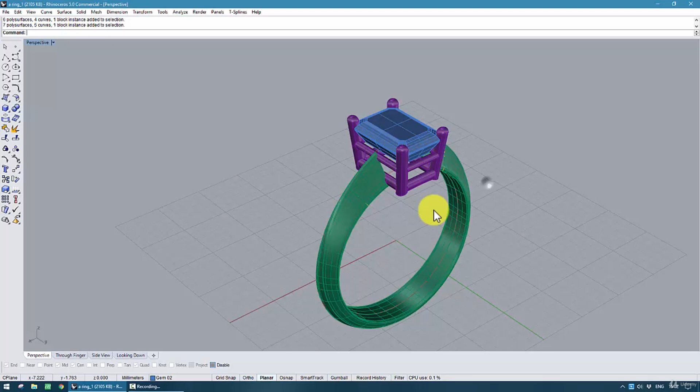Hello guys, today I would like to make a video quite different than the other videos from my courses and everything. Today it's not really a CAD tutorial. Today I want to show you something. I found this CAD file on a website. You know, there are websites where you can download files. Someone was selling this.

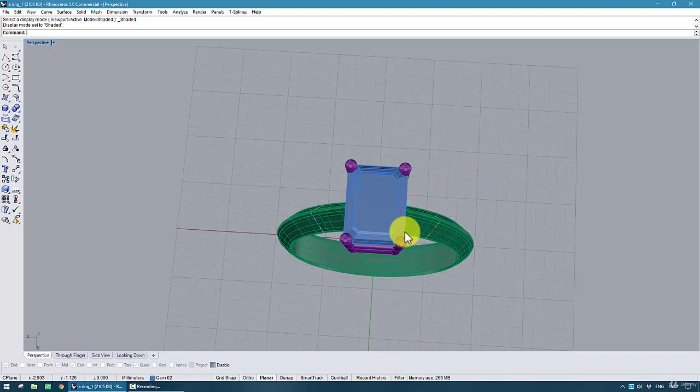As I said, this is not a CAD tutorial. I'm just using this file. I actually bought this file because I want to show you what a bad ring looks like. This is not about I like it, I don't like it. The video I'm gonna make today is from a technical point of view, why this ring, in my personal opinion, is wrong.

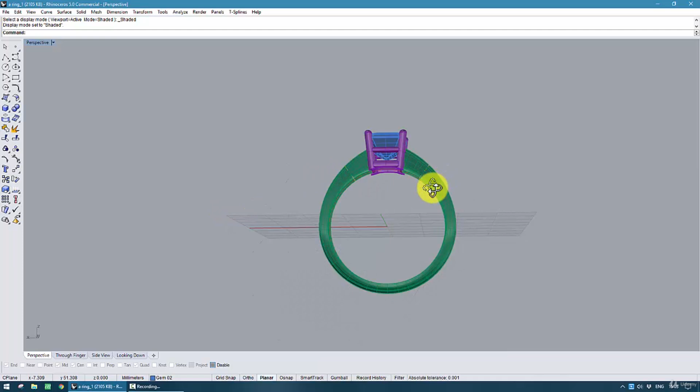I'm not criticizing anyone's work. I'm not gonna say who did it. I'm not gonna write down any names. I don't know who did it actually, so it doesn't matter. Why do I think, and again this is my personal opinion, that this ring is wrong? Several things. First of all, if you look at the shank, it's not the first thing that is wrong, but you can see that it's very thin.

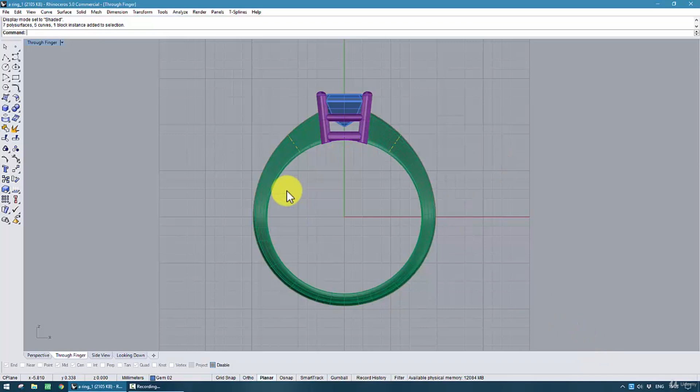This file I assume has been done in Matrix because of the gems layout. It doesn't really matter. As I said, this is not a CAD tutorial. I'm just using Rhino because I got this file in Rhino format, so I could use it as a whiteboard to show you. Why do I think it's wrong? First of all, as I said, the thickness of the shank. Let's measure this. Linear dimension.

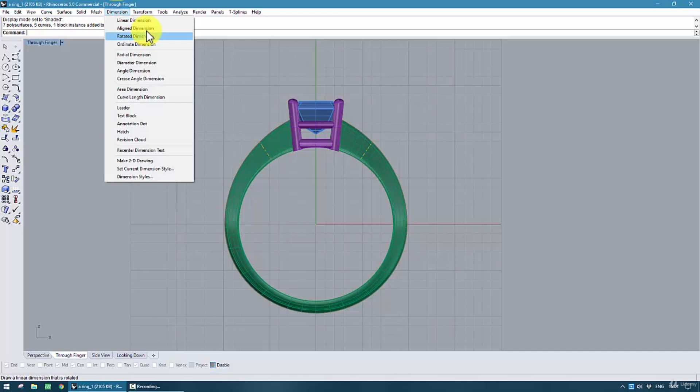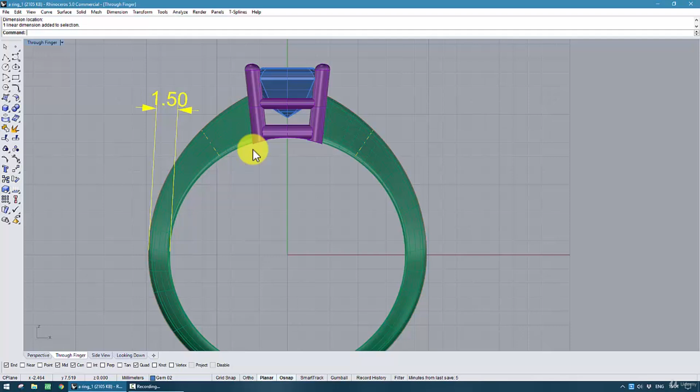Let's see, this is 1.3. 1.3 on the CAD is gonna be 1.1 once it's cleaned up and polished. So in my opinion, it's too thin. If you check the sides, 1.5. Again, 1.5 is going to end up being 1.3. I usually would not make it less than 1.5 on the final. So when I make the CAD file, I tend to use 1.8. 1.6 I would consider thin already. It's not super bad, but it's too thin anyway.

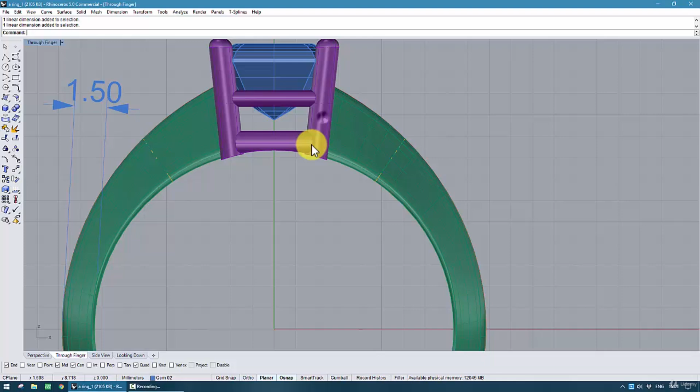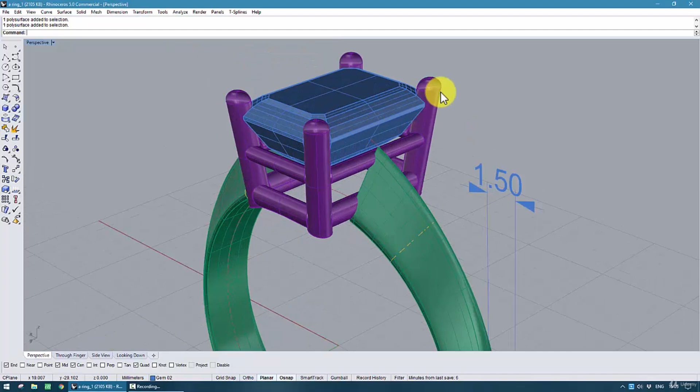What else is wrong here? You can see the way this joins to this. It's just too thin. Overall the whole model is flimsy, so this setting is just too thin everywhere, so the stone is not really secure. It's quite likely that the setter might not even be able to set it properly. If you see the claw, it's too far inside the stone. It doesn't need to be like that.

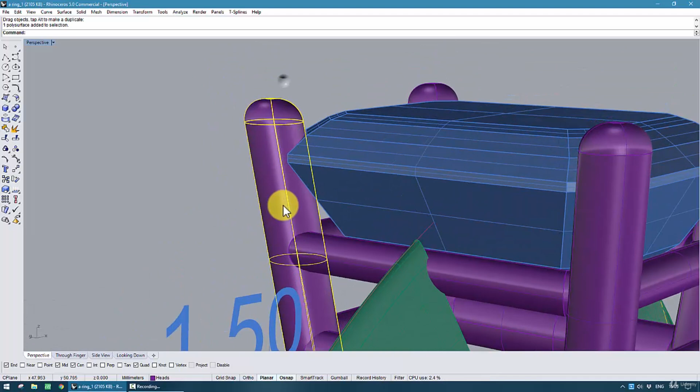It should be fine. You have to bear in mind that the metal contracts. The metal always shrinks a little bit. So this is usually how I would do it. That is way too much. The problem you could find is that once the setter is setting it, the setter needs to remove a lot of metal. So once the setter is setting the claw, you would end up with a little bump here. That's just not nice. It shouldn't be like that.

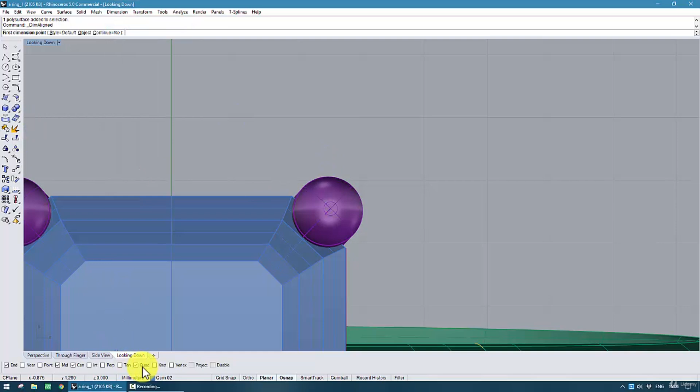The thickness is alright. I think that's gonna be like 0.8 or something like that. Dimensions, aligned dimensions. 1.1. So it's alright. In terms of thickness, it's alright.

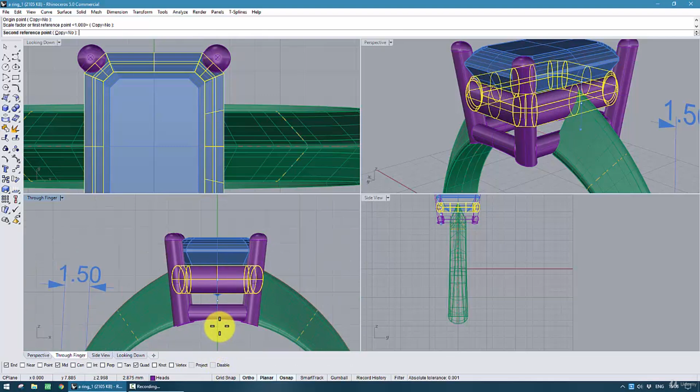What else? This. We talked about the thickness when I was in perspective; this way it should be a bit thicker, it should always be thicker this way. I'm not editing the file properly now, I just want to show you what I would change. This should be thicker. I tend to make it quite thick and I tend to make it straight. You could also make it round, it's possible, but it should be thicker.

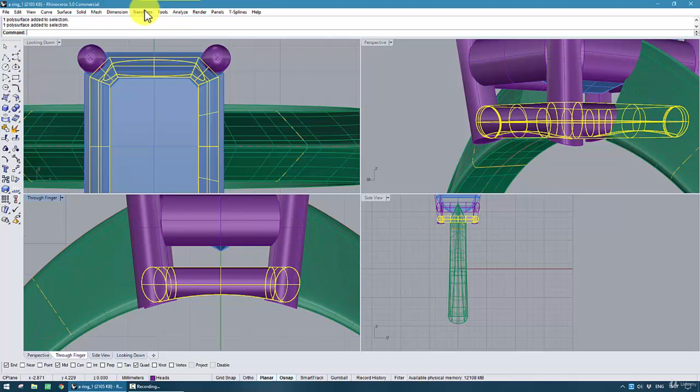And this one, it's not really bad, but at least here it should be like 0.8, and something tells me that this is gonna be a bit thin. 0.8, just about right. But still, I would make it a bit thicker, and I would not make it round. I tend to make it straight.

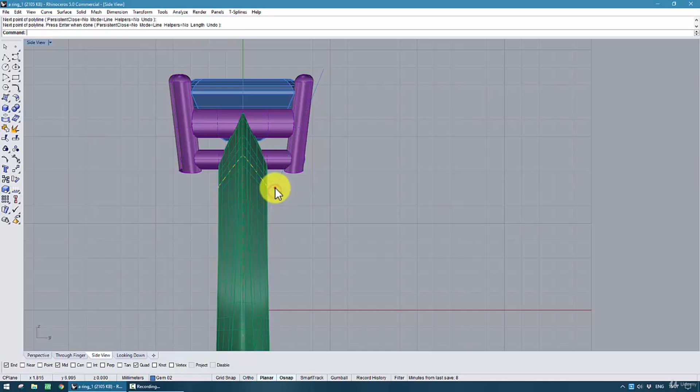Also, if you look from the side view, the setting goes pretty much straight down. Ideally, this should go like that, at least more of an angle. This claw goes very straight. It's not that it will affect the manufacturing. You will still be able to make it, to print it and cast it, but it's much nicer when you look at it if the setting is tapering towards the shank. Also, I would make the shank a bit narrower.

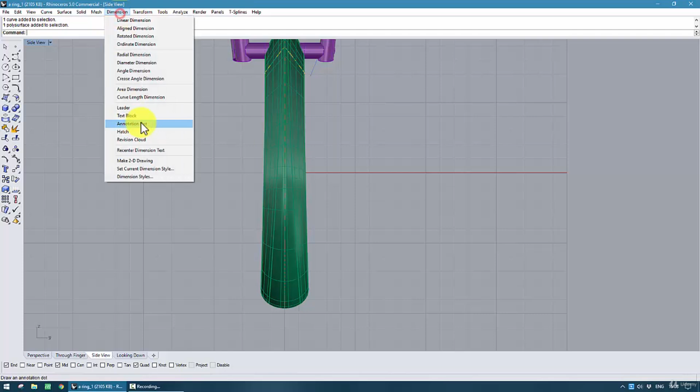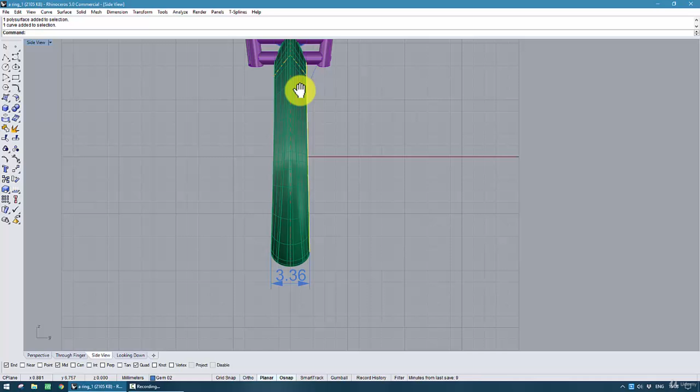I might remake the whole ring later myself. So it's alright. Also the taper, if you trace a line from here to here, you see, you have an empty space here that you shouldn't have. It's not going straight. I'm exaggerating now, but it goes a bit like this, which it shouldn't. It should always go straight.

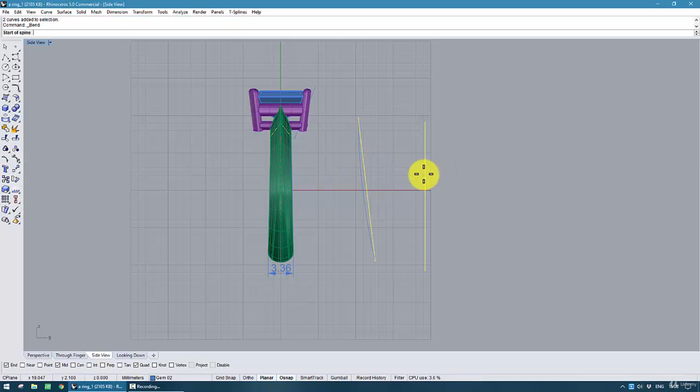There are many ways that you can make a shank. You could always make it, instead of like this, like this. A bit like this. I'm not showing step by step how to do something. As I said, this is not a CAD tutorial. I just want you to understand why, in my opinion, this design is wrong.

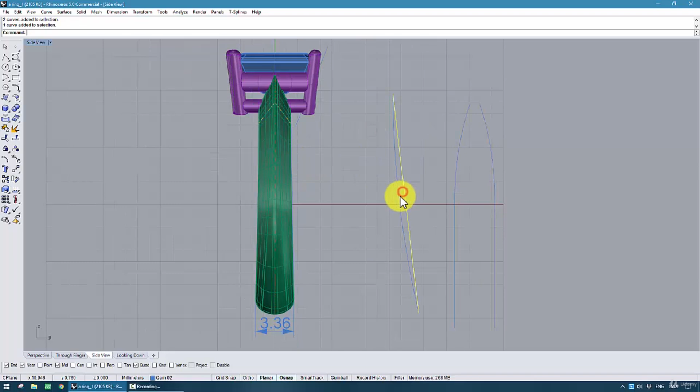Right, so as I was saying, this shank at the moment goes a bit like that. It's curving in, which shouldn't be like that. You could make it either straight, probably not so straight, probably more like this, or like this, but not curving in like that.

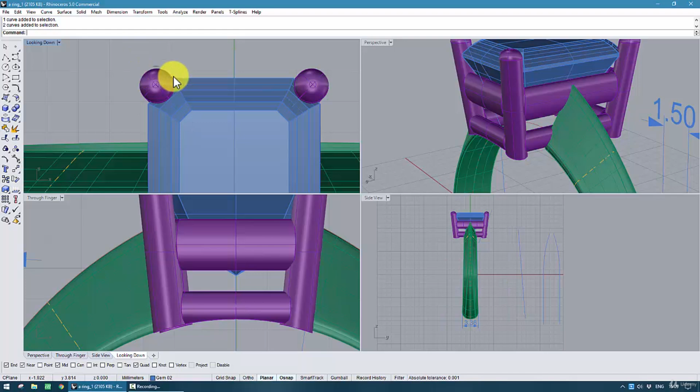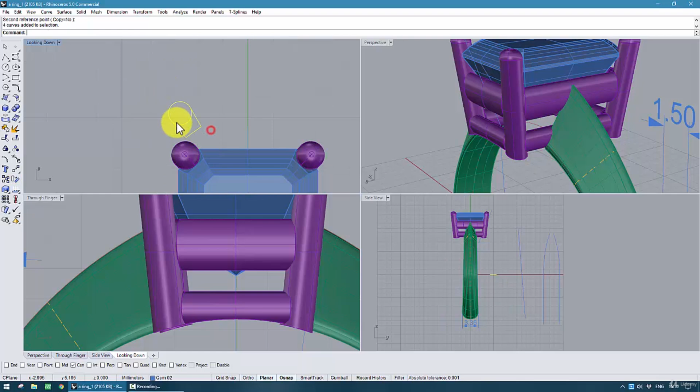Another thing, the shape of the claws, technically it's possible to make it round. This is my suggestion, it's not that it's wrong, but you could have also made it a bit like this. Something similar to this. So it looks a bit nicer once it's set.

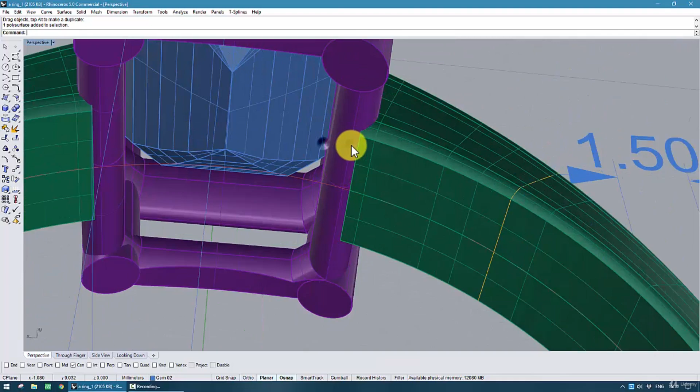What else? As I said, the way this joins with this, you cannot have this. You can either make this in one part or in two parts, but what you cannot have is this. It would be slightly better if this was a bit lower, and then you just chop off the whole setting like this. If you just chop it off like that, it would be better. Still, it would be wrong. Could be improved substantially, but it would be better.

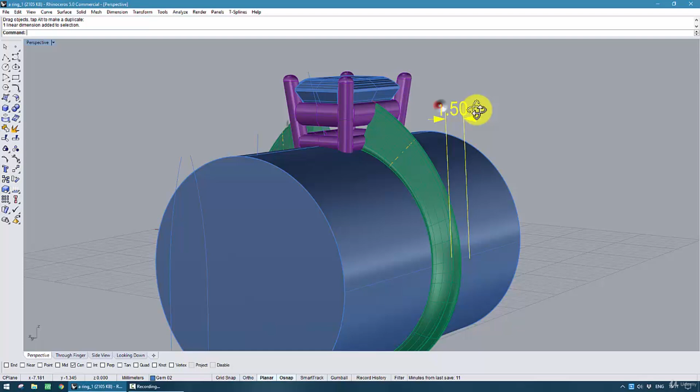What else? Well, the main thing I wanted to show you is the thickness of the whole thing, especially the shank. I'm gonna make another video now. I might put both videos together, how I would make it. Again, this is not me criticizing someone's work. I just want you to understand why this design would be wrong.

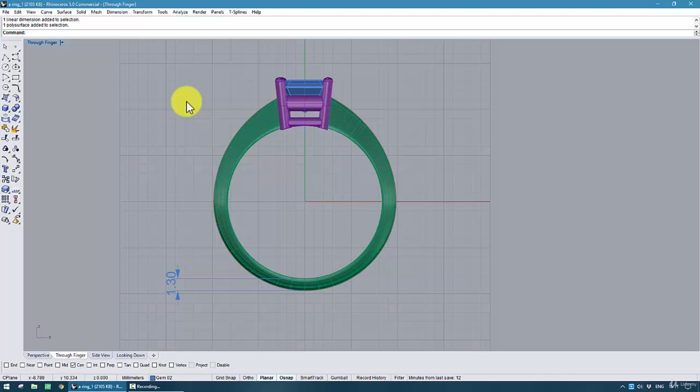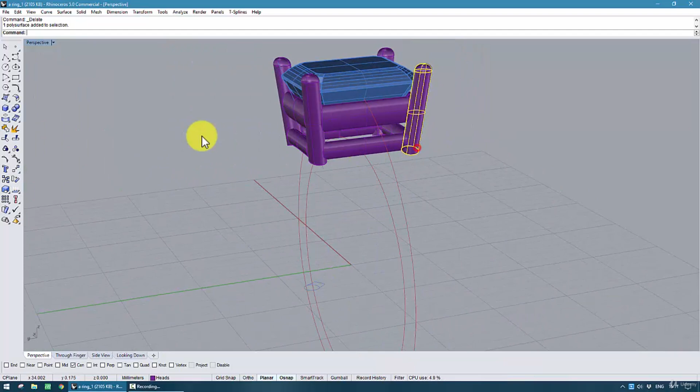Also, on the very top, well, no, it's quite alright. I was about to say, I thought this would be sharper. Well, of course, this is wrong. You cannot have this. You cannot have a little gap there. It should be joined together. But what I was about to say, not in this case, but in some models, I've seen people doing this.

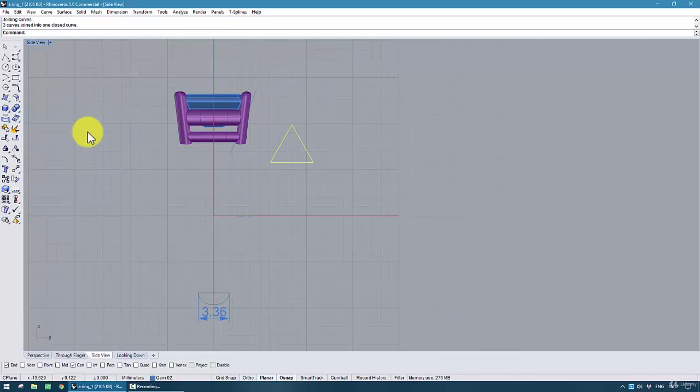When you have a triangular profile, you cannot make an exact triangle. If you have a profile like this, I'm just gonna make something simple. I'm gonna make this as a band, just to show you. Right. Imagine that this was a ring, which is obviously not, but imagine that this was a ring.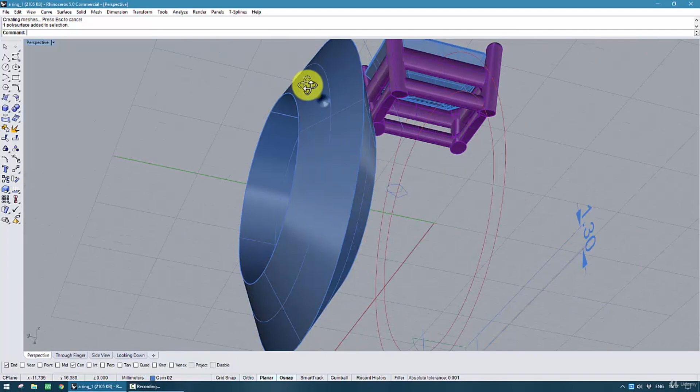You cannot have edges like this, basically because they will just wear out. It's gonna go very soft. The edge is too sharp. So if you make it like that, it's gonna start breaking. Even on the wax, when you print the wax, it's gonna break apart. So if you have to make a triangular profile, what you would do is this.

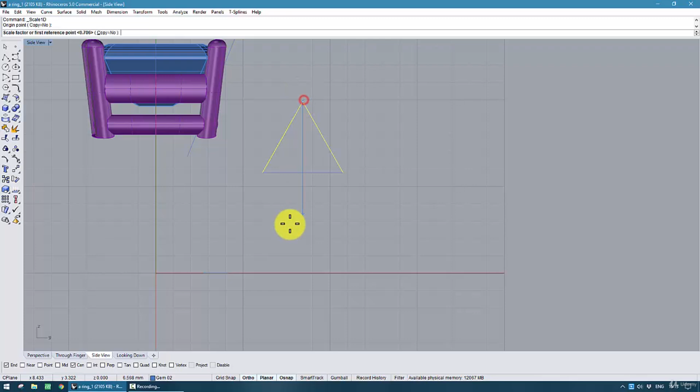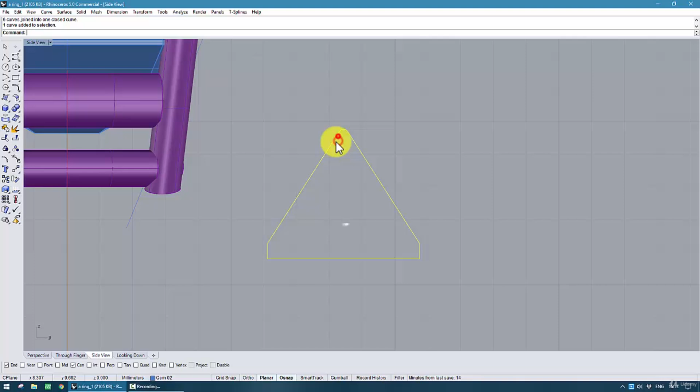You always have to allow a little flat on the sides, and on the top you could just make a fillet, maybe not that much, just a tiny little fillet, something like that. Right, this would be a triangular profile. If you make an exact triangle, it's just not gonna work.

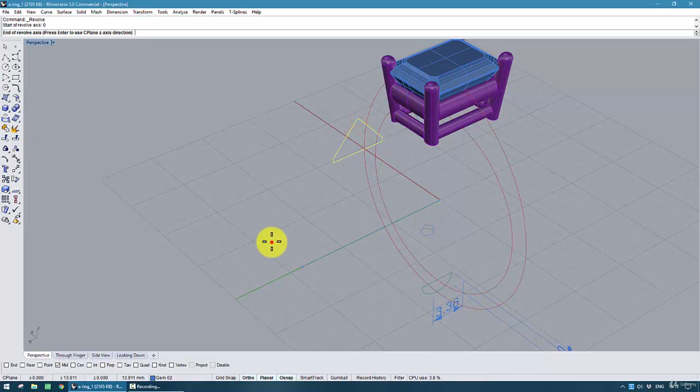Let me make it look more like a ring. Okay, so now if I turn this into a ring, this is how a triangular profile should look. I'm aware that this is not a ring, but this is how a triangular profile should look. Here should be 0.6, 0.8, I don't know what it is now, but you need a bit of a flat. So if you have an angle like this, it's fine, it's safe, but you cannot have it like what we had before, because it just breaks apart.

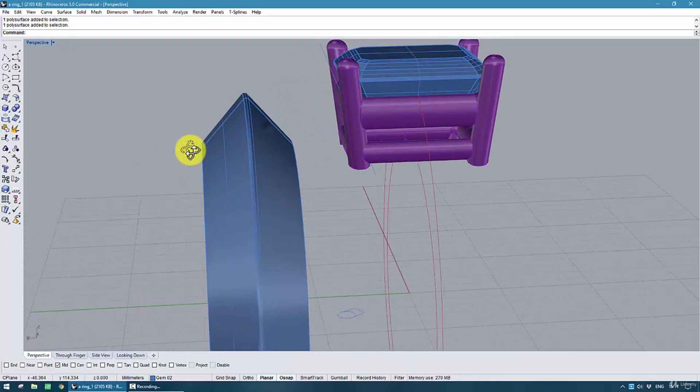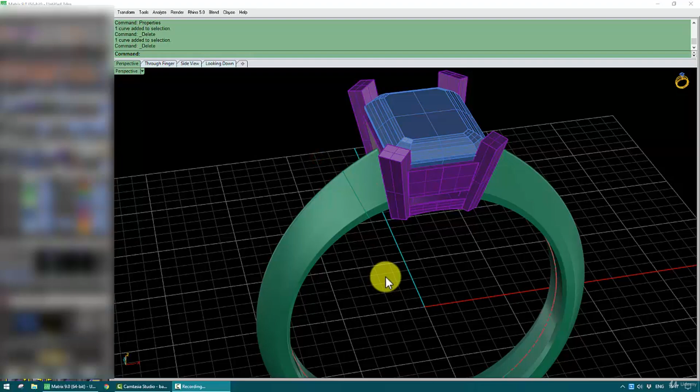What else? I think that's pretty much it. I don't want to sound like I'm destroying someone's work, but I just thought it would be interesting for you guys to know. Okay, so following the previous part of the video, what I did is I basically edited the ring. Well, I made it from scratch basically.

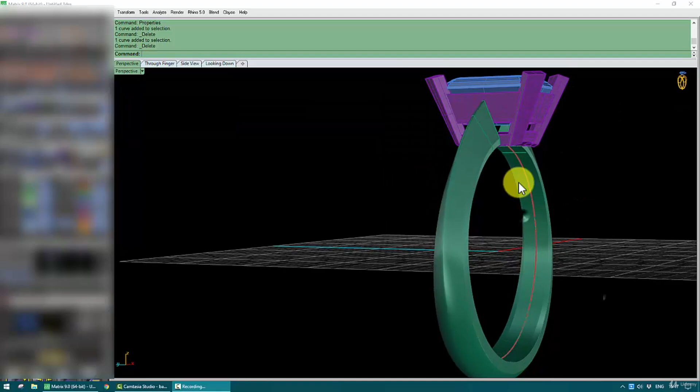This is one way to do it. There are many different ways. The only thing I would like to make sure you see is what I've done here. So you can see the shank, still it's D-shape, but allows a nice flat shape on the side. Also the claws are a bit thicker. Well, actually they're a bit thinner, but more squarish. For emeralds it tends to look a bit nicer like this. I could have also done a 2 round double claw.

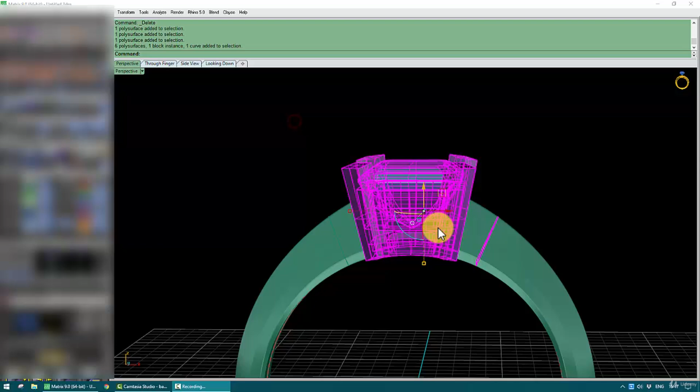I did also the ring to be conceived in 2 parts. So you can make the shank in yellow and the top in white, or whatever you want. This, I tend to make this quite flat always. My advice would be, if you're gonna use a polisher, the idea here is that if you make it flat and your polisher does it right, it's gonna look amazing.

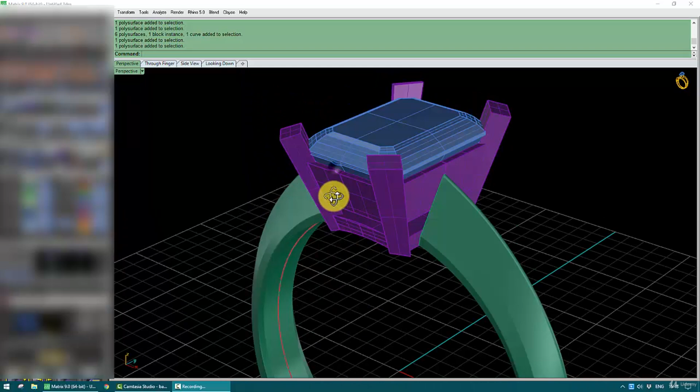In my opinion, it looks better if it's straight. If you cannot polish it so well, just make it round, because it's gonna look better. It's really bad if you make it straight and you polish it really badly, or you clean it up very badly. So it's really up to you. This is one way to do it.

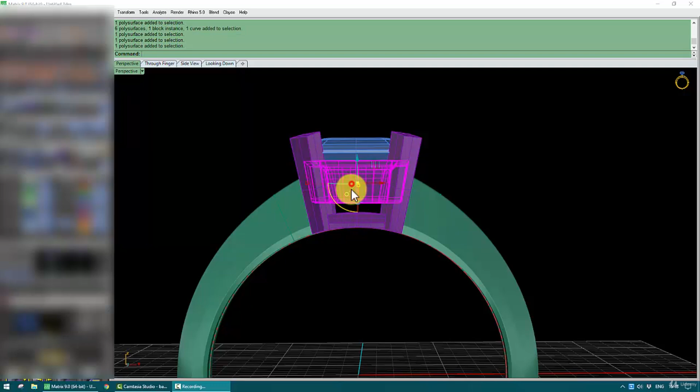This is 0.8 because I tried to keep it similar to the original design, but in my opinion I would make it 0.9 or even 1 mil. This gap is also 0.8. Could be a bit more, could be a bit less, doesn't really matter. This under bezel, under the stone, I tend to make it quite thick. Something a bit thinner would still be right.

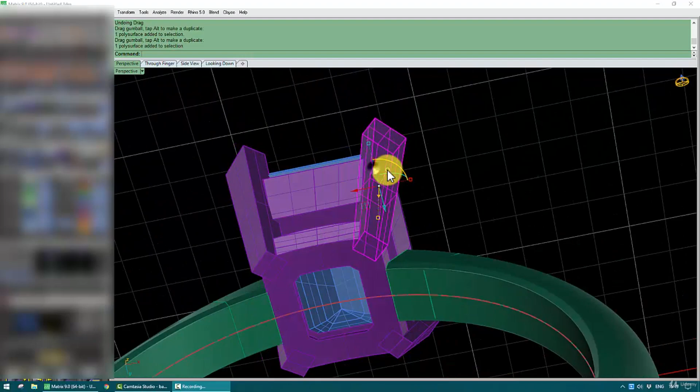Yep, maybe something like that. Some people might bring the claws a bit in. I think they are already quite in, but it could be more. Also, the thickness of the shank and the shape of the shank, I try to keep it as similar as possible to the original one, but I would not make it like this. I would make it differently. But again, that is my personal opinion.

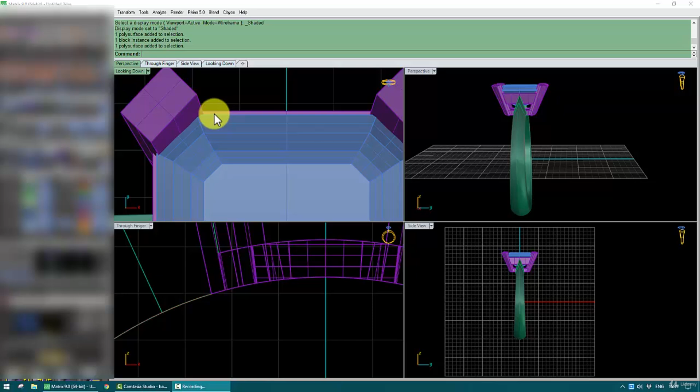Also, as seen from the top, I allow a bit more metal around the stone. That's to allow for cleanup and polishing. Usually if you make it exactly the same size as the stone, it will end up something like that, like underneath the stone. So you don't want that really, it doesn't look nice. So I always make it like 3-4% bigger than the stone.

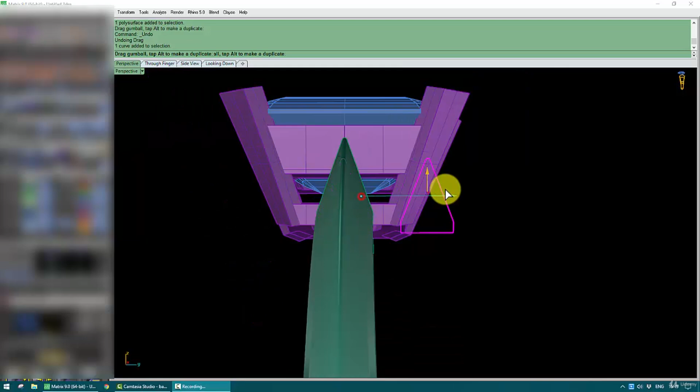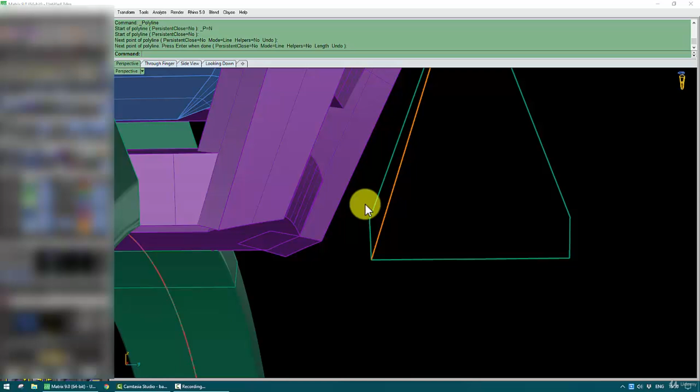Also the shank has this profile, so that, as I said before, I think you need to allow a bit of a gap to avoid having an angle like this, because if you have this angle, this corner, it gets battered, it gets destroyed, especially if you're working with soft metals like silver. This is gonna look really bad. So if you make a 90-degree angle, you can prevent that from happening.

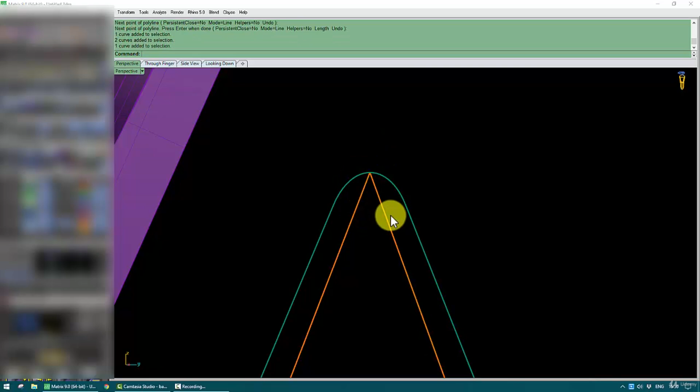Also on the top, actually I think that the guy who made the first model did it right, but some people do this. This is very wrong, because this edge will never be like that. It will be like that on the CAD file, but not even on the wax it will come up like that. It doesn't matter which printer you're using, it's just wrong. Yeah, the close-up made them squared. I'm not very convinced about that, but that's just one way to do it.

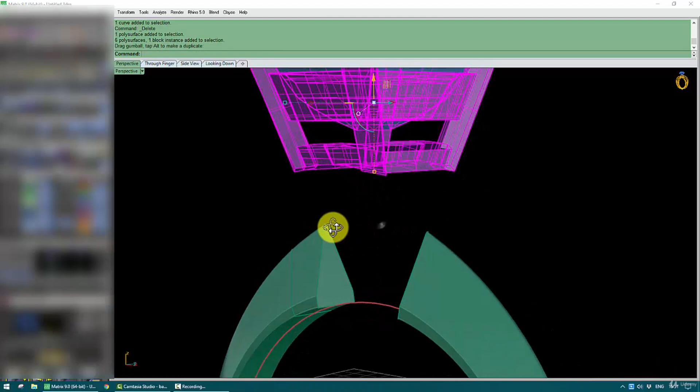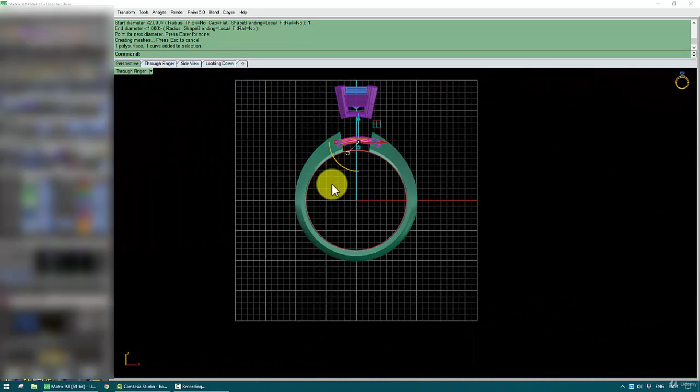And again, these parts fit together in case you want to make it in other metals. If I was to print this, I would put a bridge here for casting. Let me just do it something like that, just to prevent tensions in the casting. And that's pretty much it really.

Again, this video is not supposed to be a CAD tutorial. I just wanted to show you why certain rings look like certain ways. It's not because of aesthetics. There's a reason for that. So these are some of the reasons. Okay. Again, I don't want this to seem like I'm criticizing someone's work. Could be that it's someone who's learning. Fair enough. We've all been there.